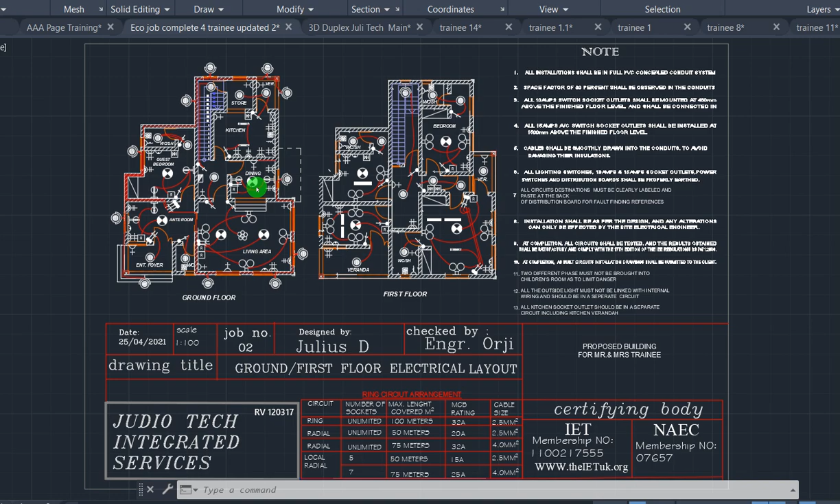Then electrical installation of buildings is a typical example of what I have now. This is a drawing, this is a floor plan. Let's start with this: if you register for electrical installation of buildings, you will understand how to read drawings, electrical floor plan drawings. I have a setup of drawings for that particular training.

I'm going to teach you so many drawings on building drawings you need to undergo: single line drawings, layout drawings, floor plan drawings, power drawings, segregation drawings, and load distribution drawings. So they're going to expose you to that.

Then this is floor plan.

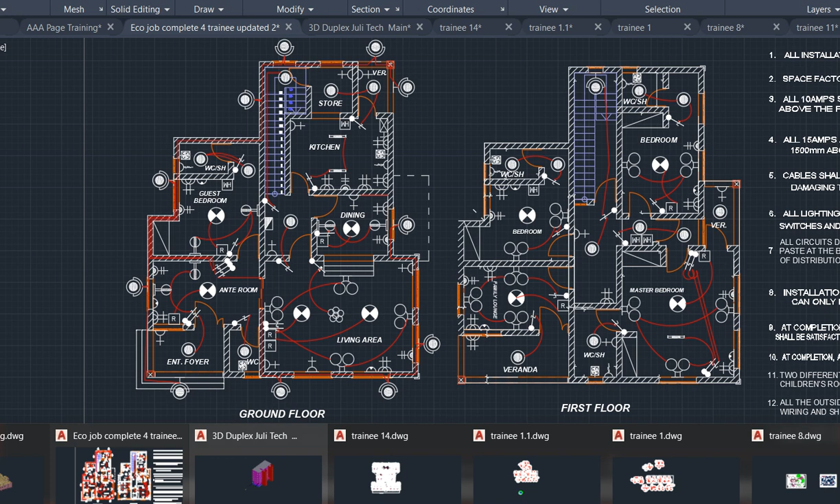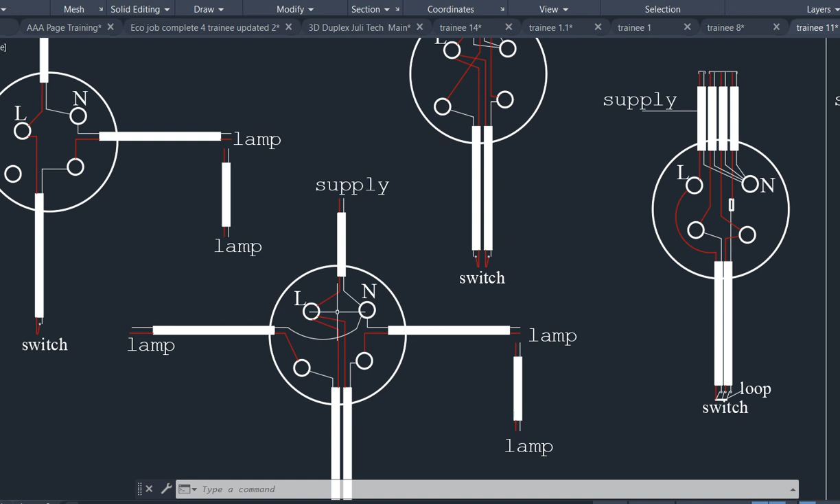The stage one in your electrical wiring installation is for you to understand connectivity, electrical wiring connectivity. Let me see if I have some of the drawings here. I should have something like this. You should understand the connectivity within the electrical installation of buildings, how it's supposed to pass through wiring connectivity, so you understand how to do surface installation, trunking installation, conduit installation, and the connectivity within this.

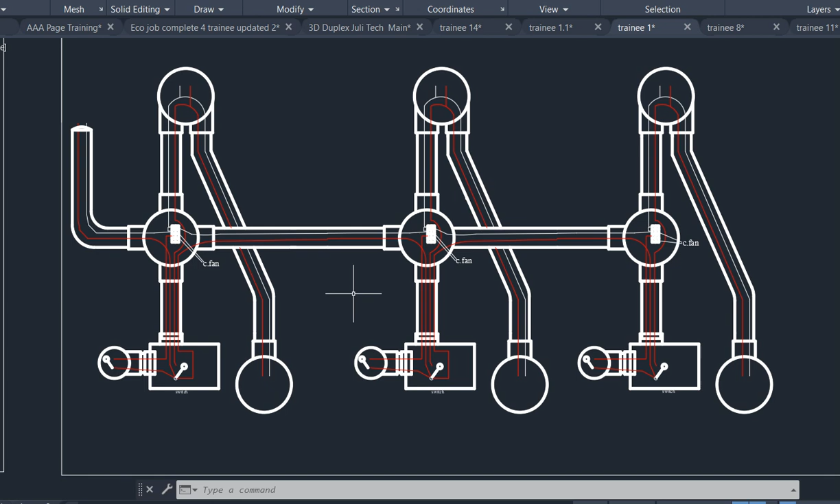After that, it will teach you about how you do your conduiting, your conduit arrangement. We expose you to the difference between surface and conduit and their accessories. The connections are the same, it's just a change of accessories, but the method of changing connection is exactly the same. What changes between surface and conduit is the material, the accessories you're using. The junction box we use for conduit is different from surface installation. Then the cables are different too. Cable for conduit installation of a building are single cables, while for surface they are twin cables. So these are the things you need to undergo.

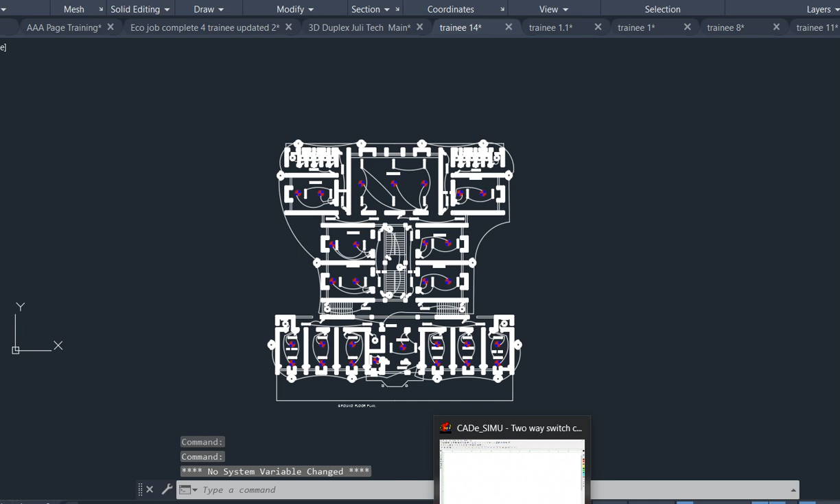Then before that, we now go to what we call drawing setup or floor plan. You understand floor plan, how to read drawings. Then after that, you're also going to go into how to evaluate your drawing.

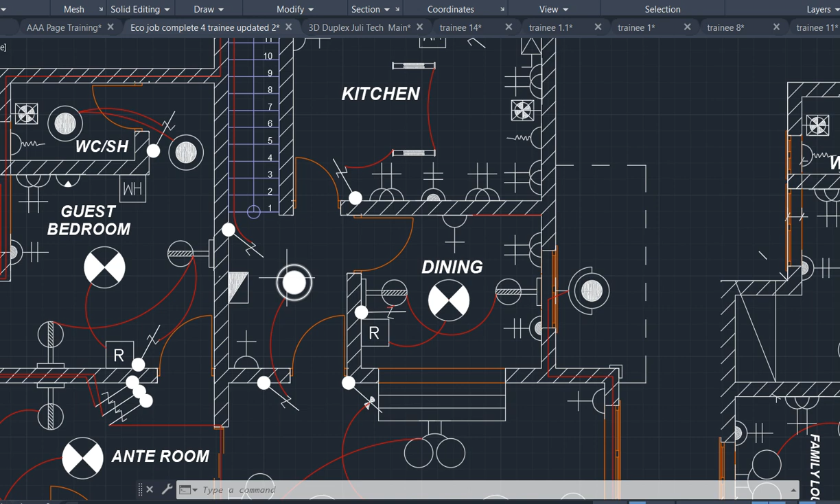How do we evaluate our drawing? We now count our lighting systems, count your lighting points, then total them, and from there you generate your bill of quantity. You also understand each point of light, what is the title of each point of light, how many watts are you using for your calculation for one point of light, what is the wattage to be used. Because you must do your circuit calculation before you identify the particular outgoing MCB from your distribution board, before you determine the size of your MCBs.

You do calculation. You don't just pick any breaker size, and you don't buy a distribution board with breakers already inserted in it. Please take note, do not buy a distribution board with breakers inserted in it. You buy the distribution board differently and you buy breakers differently. Because you buy them differently, you're going to carry out your calculation of your circuit, to know what is the breaker size for my lighting circuit, what is the breaker size for my ring circuit, what is the breaker size for my power circuit.

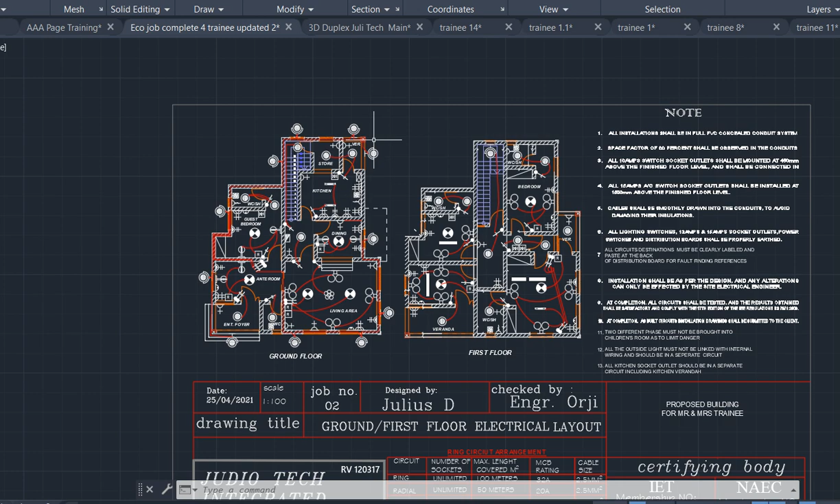All right, now that's set aside. After doing this calculation, you understand. Now come again, what is your layout? You have to learn how to understand your circuit layout. What is my circuit arrangement?

The lighting circuit within your living room shouldn't feed your dining room. The reason is, when you have a blackout within your living room, the dining room should illuminate some brightness from there to come to the other living room, pending when electrical personnel will be called upon to diagnose the fault and fix it from your distribution board or wherever. So when doing your circuit segregation and layout, the circuit feeding the living room should not be the same circuit feeding the dining room. Dining should go to a different circuit, while living room should follow a different circuit, so that a blackout from dining shouldn't affect living room, and a blackout from living room shouldn't also affect dining, because both are related apartments.

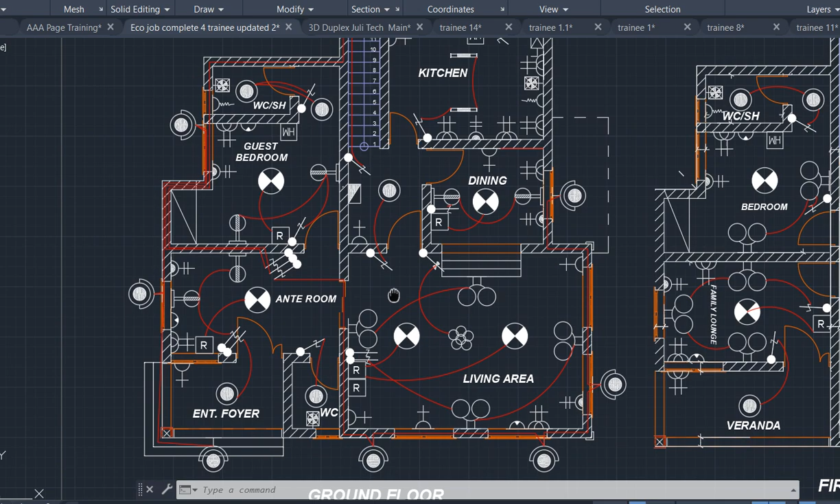Then for your kitchen - these are essential information you need to go through. As for the kitchen, it's the most essential place you need to pay attention to when you want to do your power piping, your power electrification.

No matter how small your kitchen is, no matter how small your cooking kitchen is, take note: the power distribution within the kitchen, the socket outlets you need to electrify within the kitchen shouldn't be less than 4. Even if the kitchen is going to be 2 meters by 2 meters in size, it is entitled to a minimum of 4 points of 13 amp socket outlets. It shouldn't be less than 4 points. So the minimum is 4 points. The bigger the kitchen is, the more points you provide in the kitchen. These are essential things you must know.

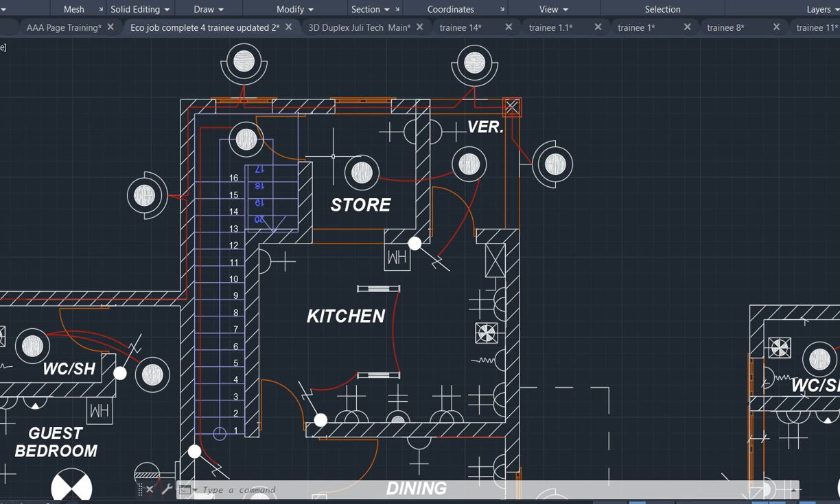Then the kitchen veranda must have at least a minimum of 1 ring point. Kitchen veranda should have a minimum of 1 ring point. Then the kitchen store should have a minimum of 1 ring point.

These are the essential things you must undergo. Okay, so these are how you do your arrangement for power distribution within your floor plan.

Then another one again, you should also learn what we call side entering and back entering. Side entering method and back entering method while doing your wiring will enable you to reduce the excess material used and also make your job faster. It will drop the stress of your man-hour. It will also drop the wastage of resources. I will demonstrate your side entering and back entering with 3D.

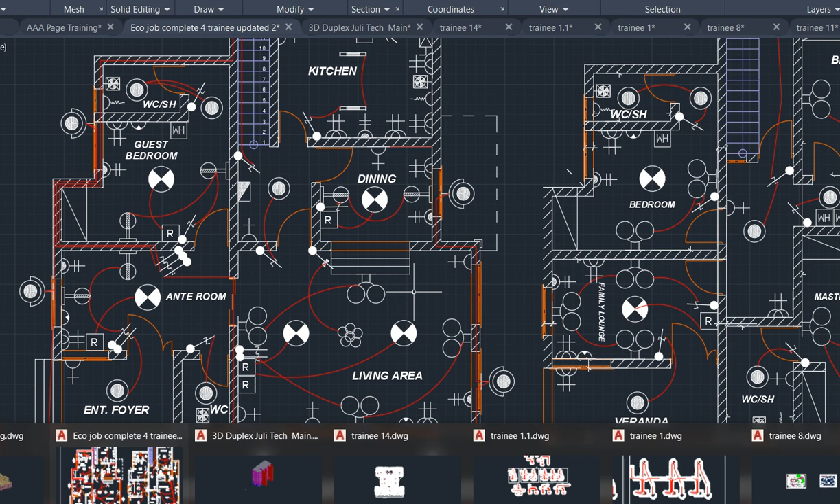Let me see, I still have 3D here. Okay, this is my 3D. Let me see if I still have the back entering and side entering. Beautiful, look at it. Take a look at this veranda. This is my bungalow piping type. So this is my veranda. Take a look at this socket I provided here.

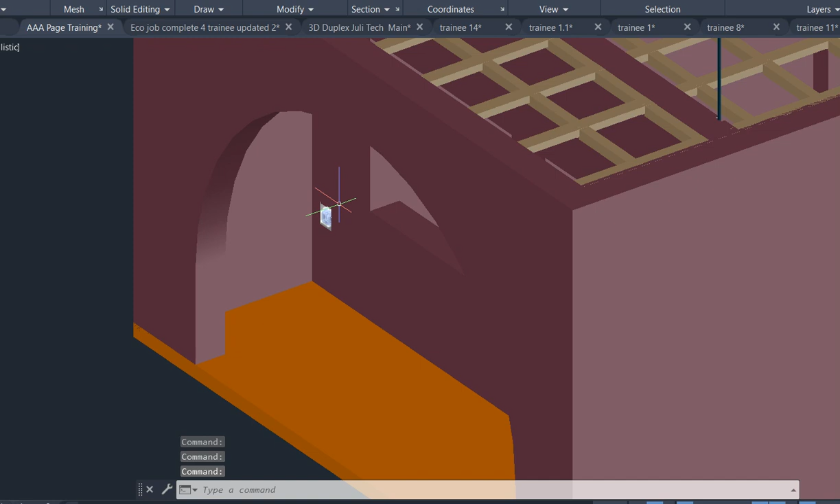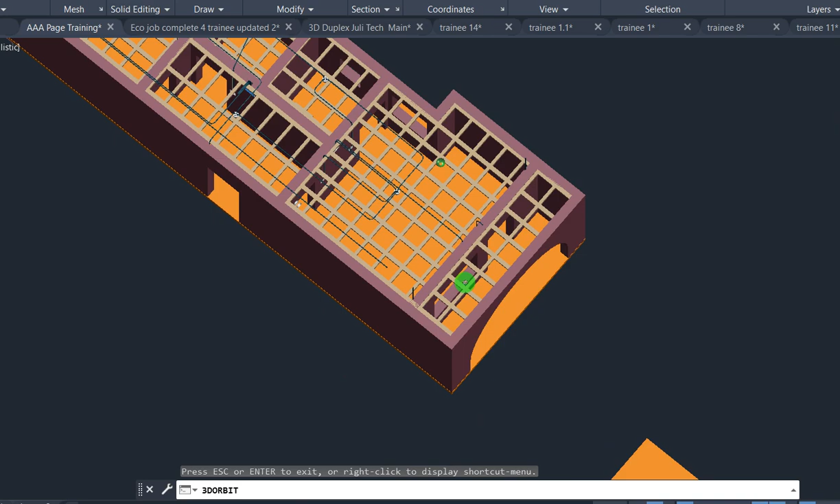This socket does not have a vertical pipe supplying here. Look, no vertical pipe. The pipe that supplies this place comes from inside the room. From the room, it projected here. That is back entering. There's a pipe. My mouse is disturbing. Let me show you the pipe. Turn this building this way. Turn it this way. Now, look down.

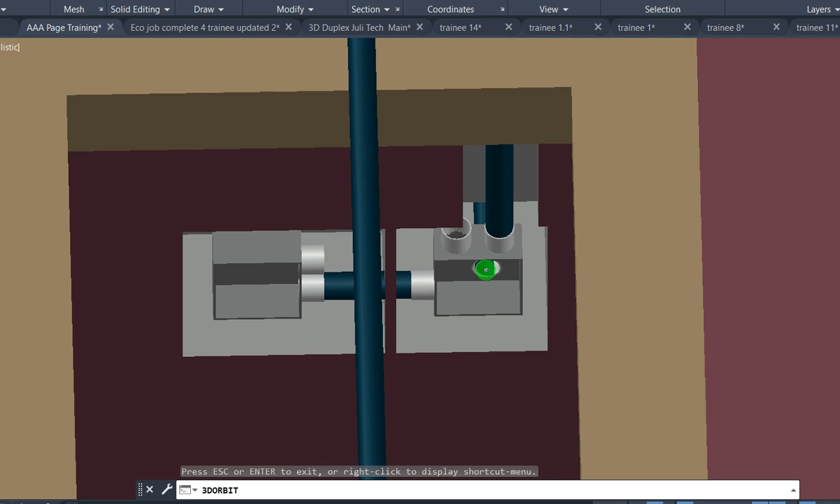Look at the back entering. This one is the pipe coming from vertical supply. You now supply this other one being side entering. You now supply another one at the back. That is the back entering. Okay. So that is back entering and side entering.

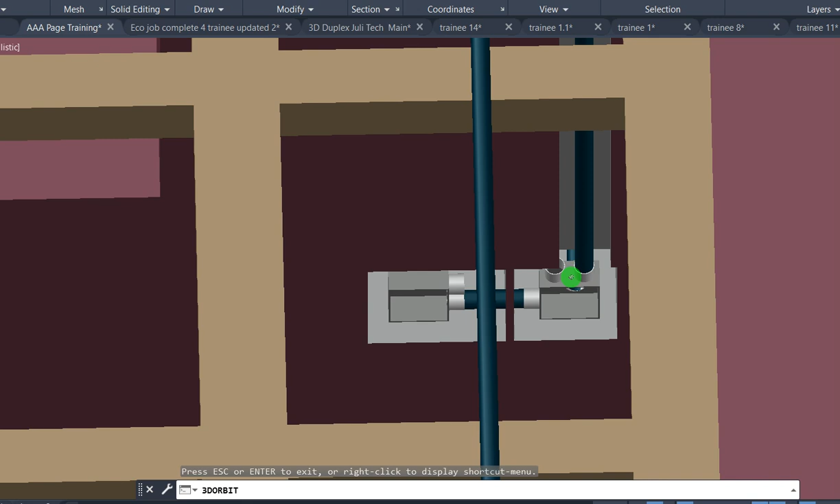Now, what I mean by reducing the resources and man-hour, instead of you taking this pipe up and coming down to supply this, you now shortcut by doing side entering. Then this one, instead of going up and coming down to the back, let me see, just turn this way. Okay, take a look at this. Look at the back entering. From here, you now project to the other side.

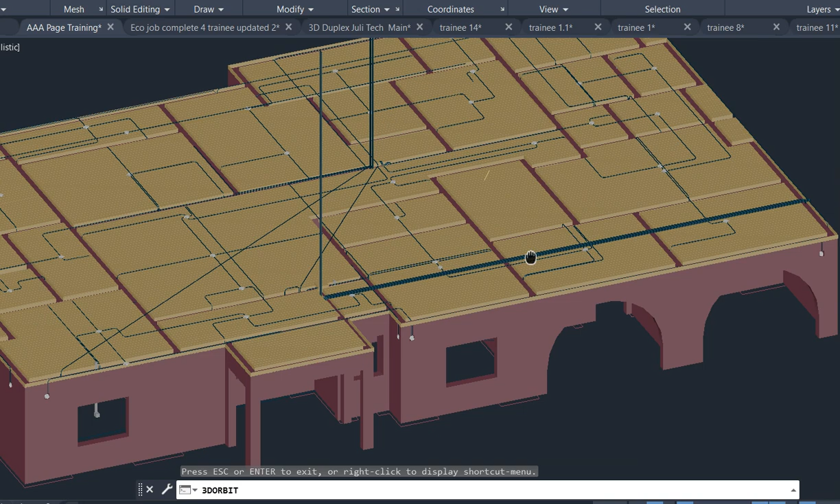That is back entering. So during your circuit calculation, this is floor plan. This is the board. After the civil work to the lintel, then carpentry job will take over to provide this board before your electrical piping will commence. After that, iron benders will come and put their beams. Conventionally, electrical would take place before iron, but because material integrity is not ascertained, we allow iron benders to do their job before this one takes place.

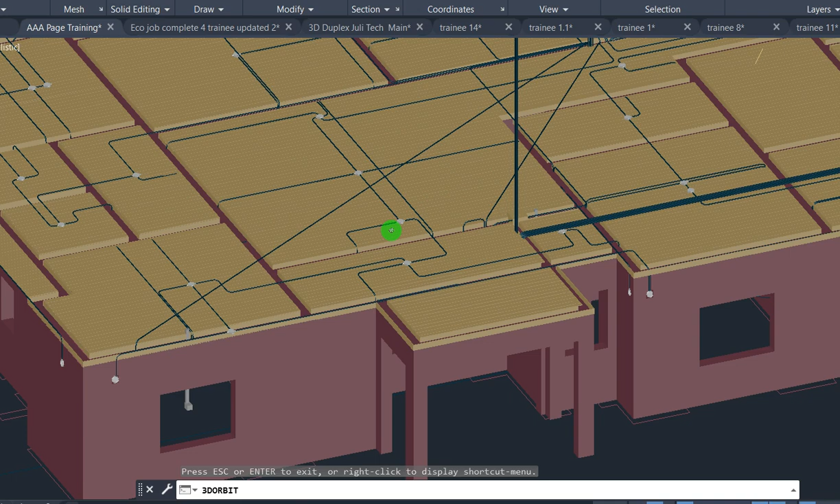But in my simulation now, in my software, I don't have to bring the iron here because it will drop the graphics of my system. So I will just show you the pipe. I will not show you the iron. I don't have to design the iron. That's why you can't have iron here, but I will just show you my pipe.

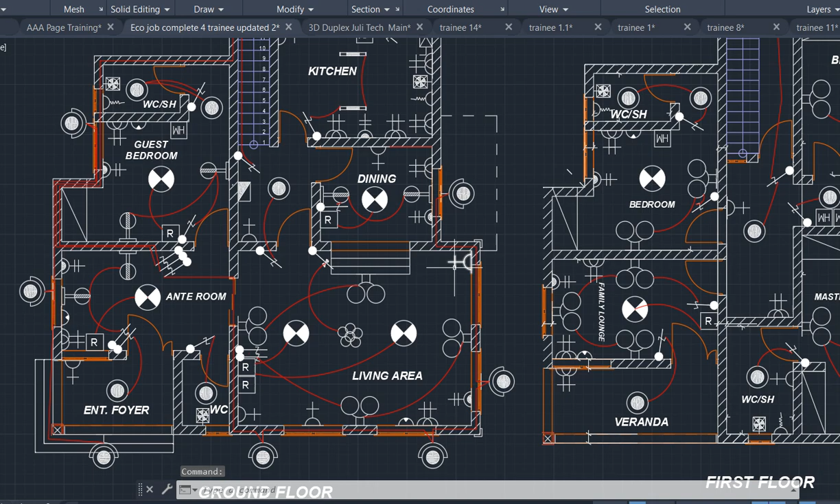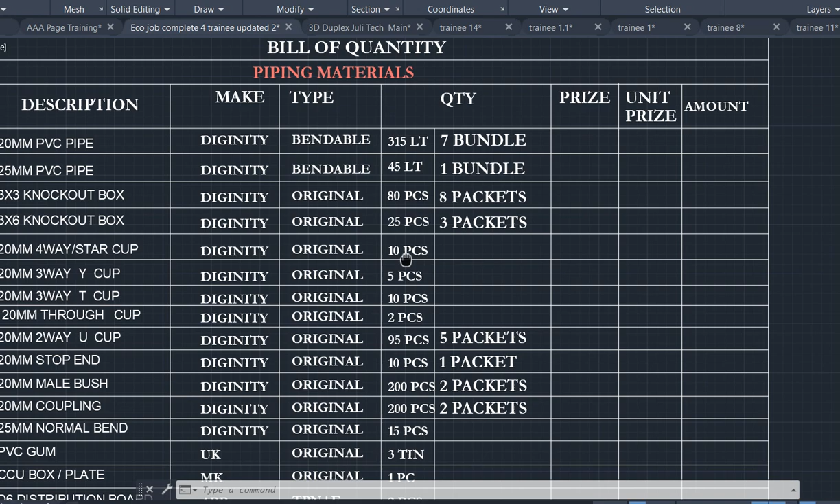Okay, let me show you something now. So this is where we are. We are discussing this. After this calculation, after you determine the number of circuits to be used, number of points per circuit, and how many circuits to cover per floor, you now generate your bill of quantity. I think I have a bill of quantity here. Yes, generate your bill of quantity to know the number of accessories and materials you need. This is what you use to generate your quotation.

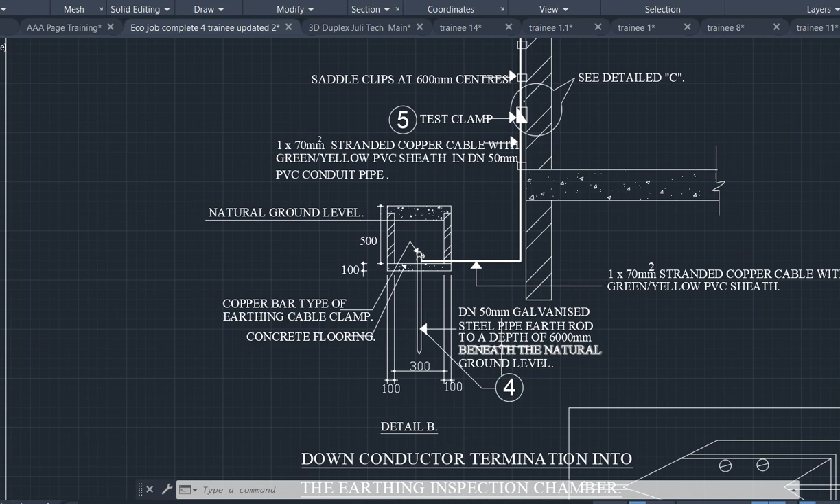All right. So after that, we teach you the earthing system. That is another essential part of installation. Earthing system. I use AutoCAD to bring out the procedure here, from digging of the ground. This is the ground. This is the earth electrode that will go into the ground. These are the stipulated processes you must maintain. Then from there, the earth continuity will go to the building. You have to settle them depending on the type of earthing system you are using.

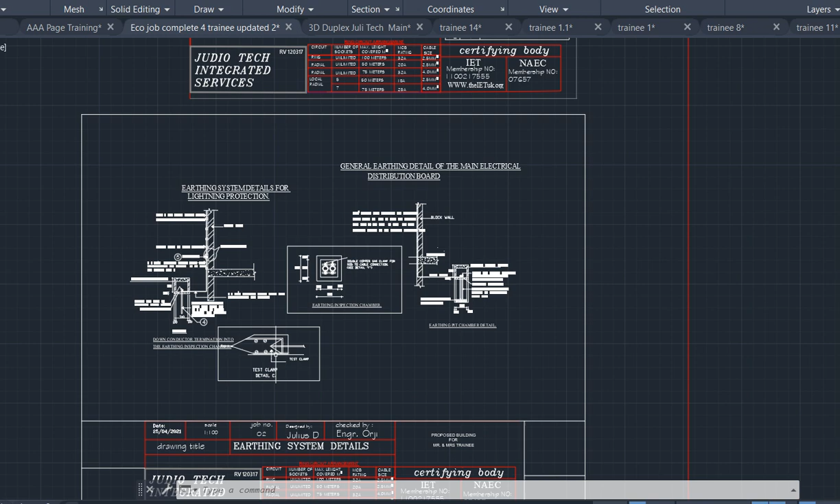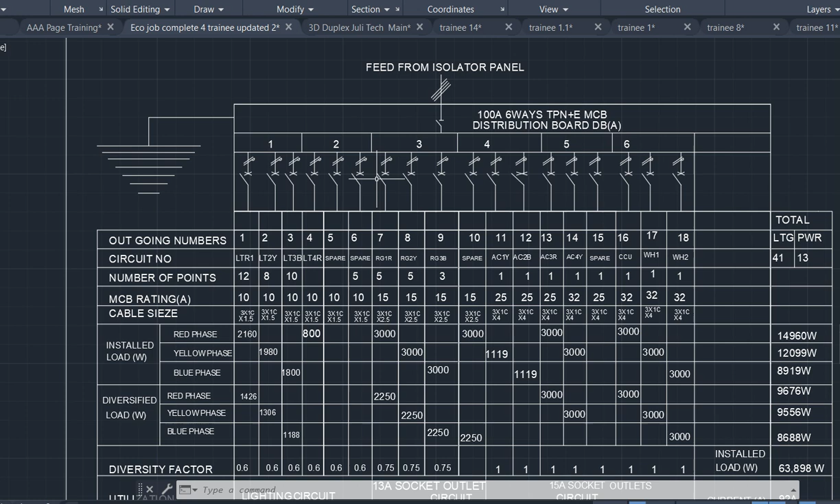Okay. Then what else? Yeah, we also have to teach you this other part. This is your load description and your load segregation. You have to provide this table and paste it at the back of your distribution board. You need to understand this.

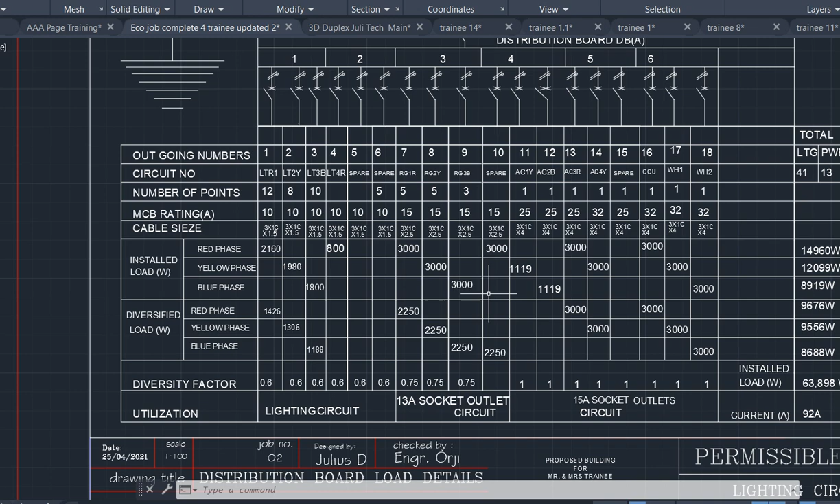This is how you do your load balancing and load sharing and load segregation. You do all of them and write them here. Each place that your circuit supplies, for instance, your circuit one supplies dining room, sitting room, master bedroom, and lobby. When you come to your load sharing table, you have to describe those areas. Okay, you have to describe them and write them at the distribution board cover.

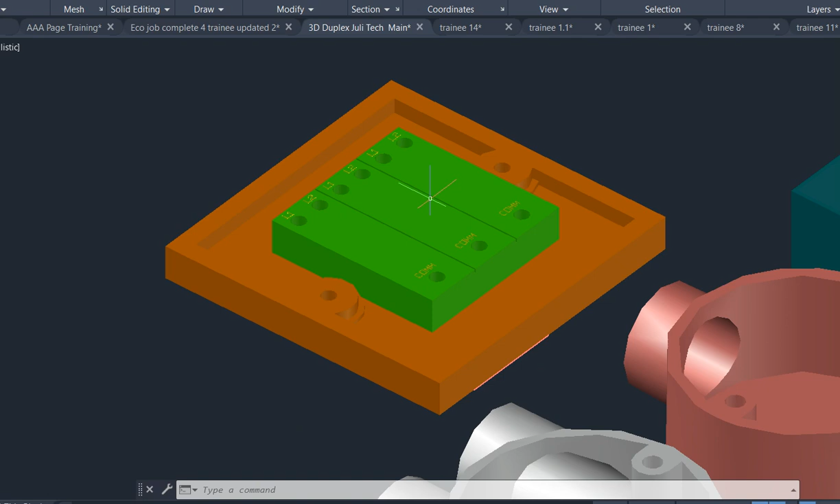So we have to generate all that. So these are the processes you need to undergo. That is for wiring installation of buildings. Okay. I think I have one other material I want to share with you. Okay, I will use design software to teach you how to work and how to wire your two-way control. I will use design because that one I can simulate for you.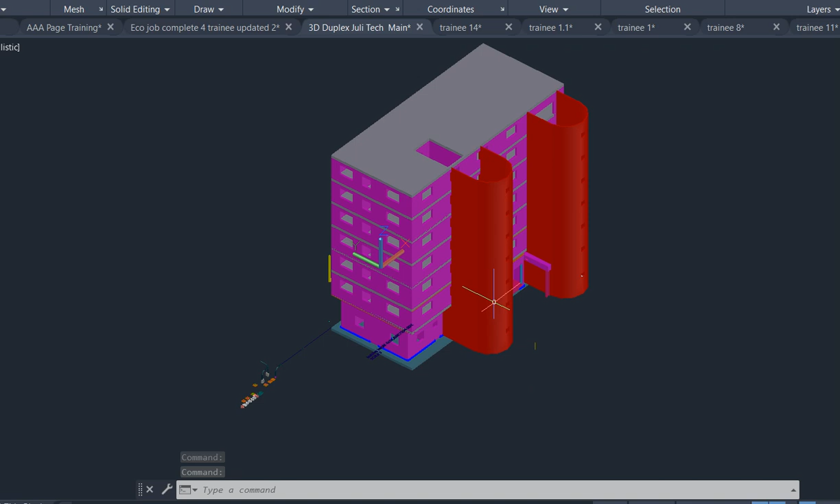Okay, so having known all that, you know how to do piping and how to bury your knockout boxes, how to do your piping and do your floor plan, first floor and the last floor, these high-rise buildings. The piping method for high-rise buildings is different from normal block work pipings. High-rise building means you do your piping without block work. There's no block work, but you do your piping.

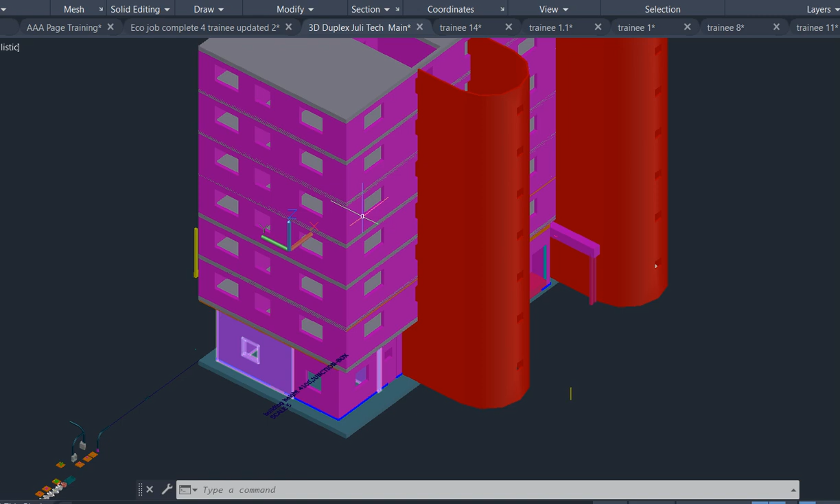After that, they will just see pillar, then the building stands, and they will deck. Another pillar will come up, another deck will take place till the last floor. Then later, partition of the block exercise will start by the masonry guys. But you have to do your job before the block work. So there is another formula for piping method for high-rise buildings. Okay, that is what I did here. I did all that before I put this block. So let me take them away so that you see them.

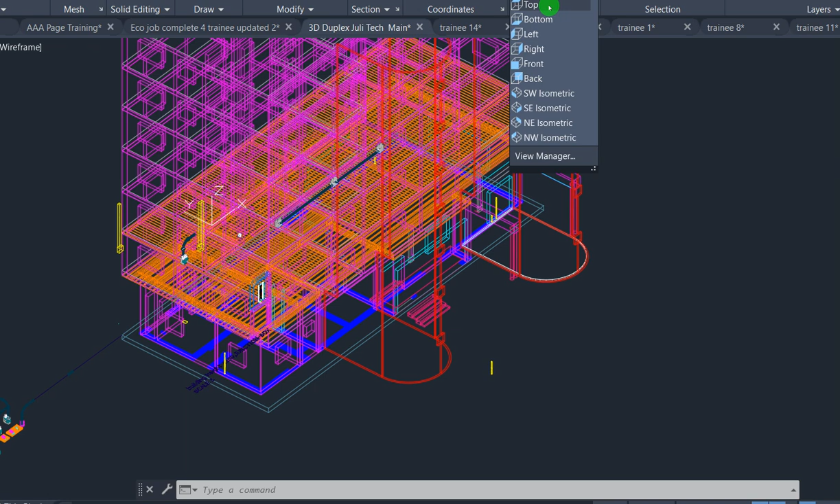I did that. Okay. If you look inside, you see pipes, vertical pipes and distribution board, this distribution board. But you can't see because it's right inside the block. But if I walk you through inside the compartment, inside the building, that is how you see it. All right. That is all you need to go through. Okay. So let me also walk you through this.

Now, beautiful. I'm going to open a design software, control software rather. I'm going to open a control software. I will teach you. We're going to make a connection for two-way control, please. You must pay attention to that particular exercise. It's going to be in another exercise. This exercise is almost complete. I will shut down this one. I will start another exercise. So in that one, we're going to discuss this two-way.

Two-way control. It's very, very important you learn this two-way control because you want to use them for hospitals, hostels, schools, banks, and amusement parks; anywhere that you have multiple entrances and multiple exits is the same method. So I will teach you how to make this electrification two-way control. Okay, we're going to use control software because that one I can simulate for you. All right, so let's go there.

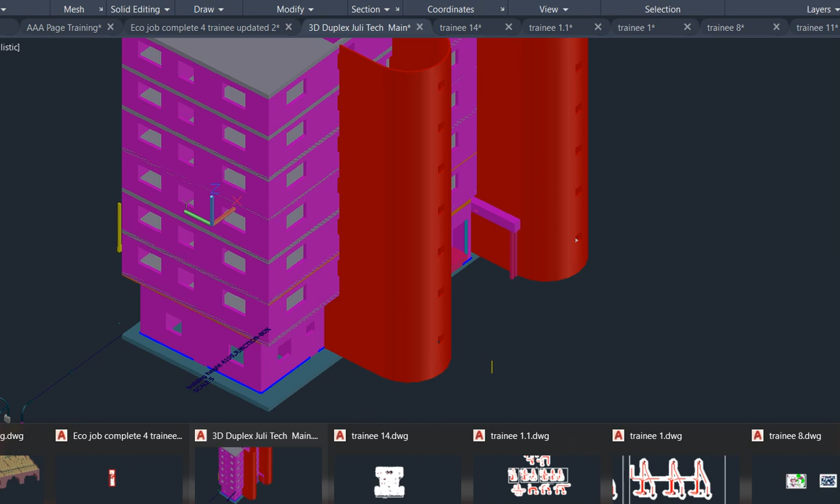Then which other thing I want to bring to your notice? Let me check. There's one other thing I want to bring to your notice that you must learn. Okay, like I said, two-way control. Now this is one of the entrances to this school. This is a school complex. Okay, this is an entrance. You can access inside the building from here. You can also access from here. It's a very big school.

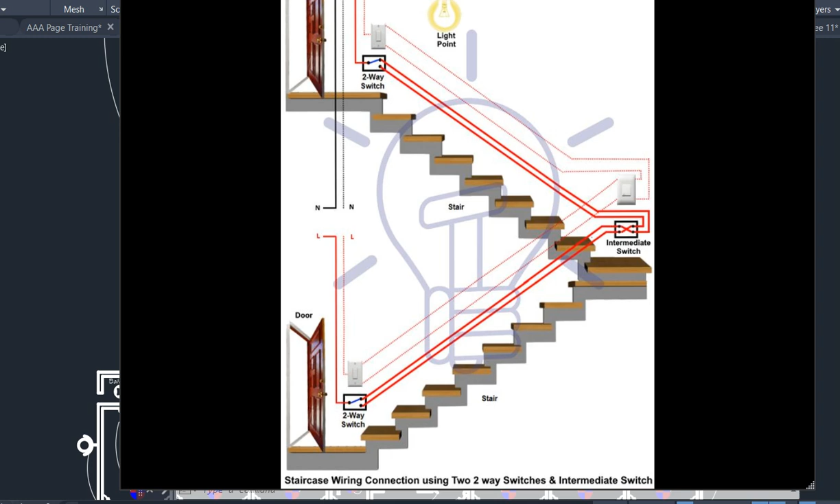Then this is another dual staircase. Okay, so if you are coming from here, or from here, or you are going out from here, you just have to activate one of these. You will locate any of these in all the entrances. You locate the switch. The switch puts on the same lighting system and shuts down the same lighting system. Okay, so let's go and do the practical there in another control system.